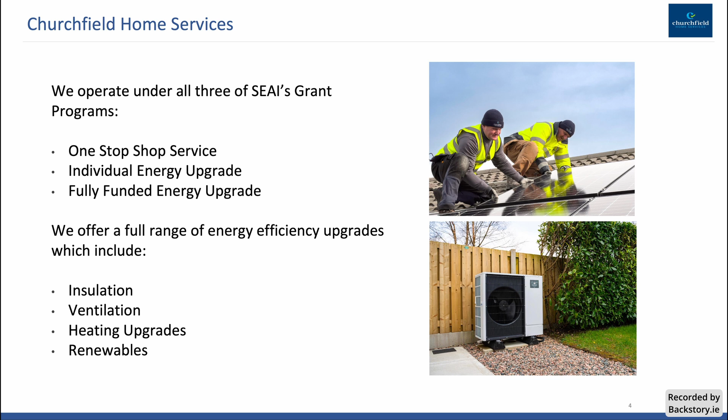We have been registered with SEAI under the grants programme since 2008, and to date we've upgraded over 6,000 homes. Last year we upgraded over 800 homes, and each year we're looking to build on that. We operate under SEAI's main programmes, the main three being the one-stop shop programme, the individual grants programme, and also the fully funded Warmer Homes programme. We offer a full range of energy efficiency upgrades from insulation to heating, ventilation and renewables.

What makes us different? We're a little different to the rest of our one-stop shop competitors in the sense that we're trained and qualified to complete all designs in-house. The one-stop shop programme is more than the grant funding. What you get when you participate in the one-stop shop programme is access to much, much greater expertise in terms of design. Obviously the integrated grants, the deduction of the cost of the grants up front. But design is really important. What we've learned over many years is that we don't depend on any third parties for our design: our fabric design, our ventilation design, our heating designs, and our solar designs.

And we find that when a building or retrofit project is well designed, that's the difference when you hear of a project that's working really, really well and somebody that may have purchased a new house in the last number of years that is not performing like a new house. We don't outsource our designs to any third-party contractors or suppliers, which ensures that all of our designs consider all elements of the retrofit being undertaken and provides an optimum design outcome on each project we undertake.

One common issue that I see quite often in the new builds sector is where you might hire a main contractor. A main contractor then may hire a plumber to do the plumbing. The plumber then might outsource the labour to a contractor, and then he outsources the design to a supplier. And I've seen a lot of the heating system designs coming back from some of our key suppliers in the country, and there'll be a line in it somewhere: it is assumed the home is well insulated.

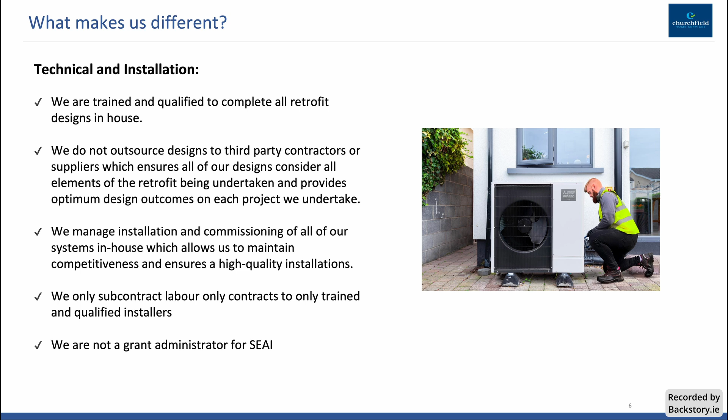The benefits, I suppose, of retrofitting a home, and I think these are quite widely understood. Primarily when we survey our customers, and we do it every year, you're looking at the enhanced comfort and savings. We're also looking at the value you add to your home. So if you've got an existing home that's a D-rated or a C-rated home, and you upgrade it to a B2 or an A1, the value of your home is going to increase.

There has been a recent study published that we were involved with, under the Warmer Homes Scheme, where they upgraded, I think, over 1,000 homes for people who had health and respiratory conditions, and they've surveyed and monitored the health of those occupants, and it can be now proven that retrofitting your home will enhance your living environment within a home, and create a comfortable, healthy living environment. We all like to say we like to reduce our carbon emissions, and in reality it's nice to do things for the environment once it's cost effective, and obviously then to avail of generous SEAI grants that are available.

The one-stop shop service, what is the one-stop shop service? It's a complete home energy upgrade solution for homeowners. So SEAI over many years have been running many pilots. So you might have been aware of the deep retrofit pilot that ran back in 2018 and 2019. We participated in that pilot, where at that time the grant funding was up to 50%. And essentially that was the pilot for what is now known as the one-stop shop. So SEAI have done a huge amount of research to understand what are the barriers that are preventing more and more people from upgrading their homes. And they have tried to put together the one-stop shop service that mitigates against many of those barriers.

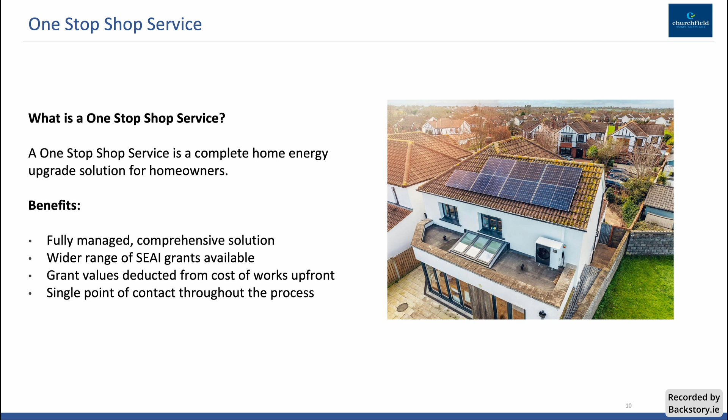What does the one-stop shop service look like? Well, our typical one-stop shop service, and I do acknowledge the one-stop shop service in general is generally going into existing homes and retrofitting existing homes. So we'll find that there will be differences and caveats for people that are choosing to opt for the one-stop shop service that are also affected by mica. So generally it includes your home energy assessment, the grant application is completed by the one-stop shop, project management is managed by the one-stop shop, installation of all works, post-BER assessment, and that access to the low interest finance.

The grants that are available. So you may be aware, and I'll just quickly run through the grants that are available through the one-stop shop process. So we've got €6,500 towards the installation of a heat pump. If you're installing a heat pump through the individual grants program, you can avail of €6,500. If you do it through the one-stop shop service, you're eligible for an additional €2,000 towards the cost of upgrading the heating system, and also an additional €2,000 launch bonus to achieve your B2.

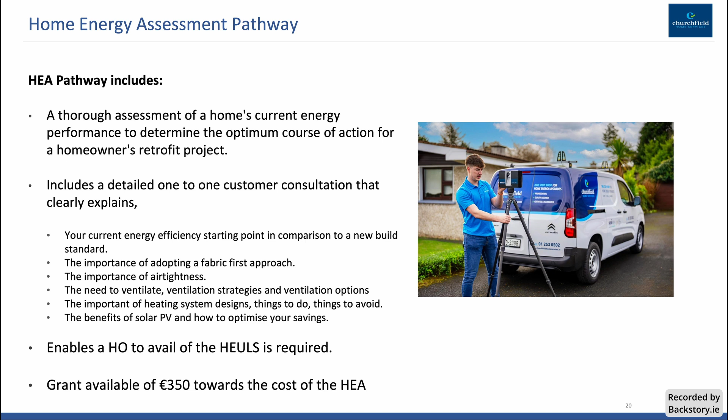As touched on, it enables you to avail of the low interest finance, and there's a grant towards the home energy assessment of €350. The home energy assessment package includes, so I've grayed out some of these things that aren't particularly relevant in your situation, but for a typical house, it includes a laser scan survey, 3D model, pre-BER.

There's a choice of 2 upgrade plans. So typically, before consultation, we prepare 2 upgrade plans. We prepare the minimum and we prepare the optimum. And then we can compare costs and paybacks and grants with both. And then it allows us to, I suppose, we ask people to come into the consultation without a bias, and let's just talk openly about what the optimum solution is.

We have an estimated cost for the 2 upgrade options. We have the detailed customer consultation to choose the most optimum solution. And then through that consultation, what I find is somebody says, well, actually I have plans to put on an extension. Or perhaps, you know, I'm looking at doing other work down the line. It also includes a technical assessment based on your chosen upgrade and a detailed home energy assessment report.

So typically the cost of a home energy assessment ranges between €700 and €800, less the €350. It's about a spend of €500. And what I would say to people is, anyone considering, just from the retrofit point of view, spending up to €80,000 on retrofitting a home, less the grants, €500 is a sensible investment. In your situation where you're looking at spending multiples of that rebuilding a home, I think it's very advisable.

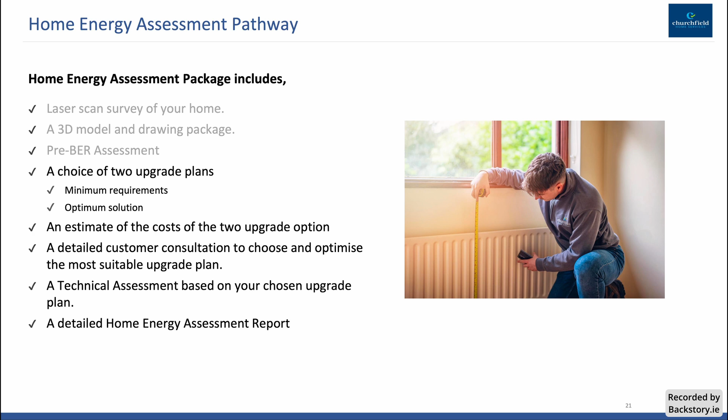Second option, the main steps that this process includes, for anyone that hasn't started your project or appointed a builder, is to contact a one-stop shop or request a home energy assessment. Typically what we're seeing, and we're working out to be the best approach, is that your architect and engineer provides the OSS with the digital copy of your plans, so you've got upgraded plans, provide those to us that we can base our design on.

The one-stop shop carries out the home energy assessment, issues the HEA report to the homeowner. The cost of the energy efficiency works net of the grants should be included as part of the tender package, and the one-stop shop should be included as a nominated subcontractor. So for people that haven't started, you've got time to get your home energy assessment, get the design optimized, and include that as part of your tender package to your builder.

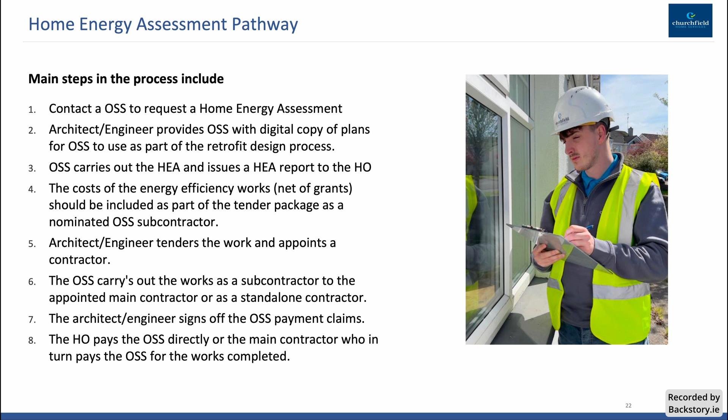For homeowners who've gone further than that, it's a little bit more complicated. The OSS can carry out the works as a subcontractor appointed to the main contractor or as a standalone contractor. The architect or engineer is required to sign off OSS payments. So at the end of the project, we have declarations of works that we need to sign off to claim the grants, and the engineer and architect are required to co-sign that with ourselves. The homeowner pays the one-stop shop directly, or the main contractor, who in turn pays the OSS for the works completed. So where you haven't started the work, it's relatively straightforward.

The home energy upgrade pathway, where building works have started, a main contractor has been appointed, but the energy efficiency works have not commenced. So for people at the stage where you've demolished a house, you have a contractor on site, works have started, but you don't have windows, or you don't have a heating system, you don't have solar PV, you can avail of the one-stop shop program through this pathway. It's faster than HEA. So where a project is on site, time is of the essence.

You've got a builder, and one of the important notes to consider is where you've a contract in place with your existing builder, you do need consent, and you need your builder to work with you to introduce a one-stop shop. If you have a contract in place, the contractor can say, well, I've signed a contract to deliver the works, I'm just going to deliver the works. So that's the conversation, and that'll need to happen on a case-by-case basis.

The home energy upgrade usually follows the home energy assessment. However, if a project is already on site, it's faster to skip the home energy assessment process and go straight to the HEU stage. So essentially the HEU stage provides the detailed retrofit designs for each element of the work that's being carried out to ensure that an optimum retrofit design is achieved.

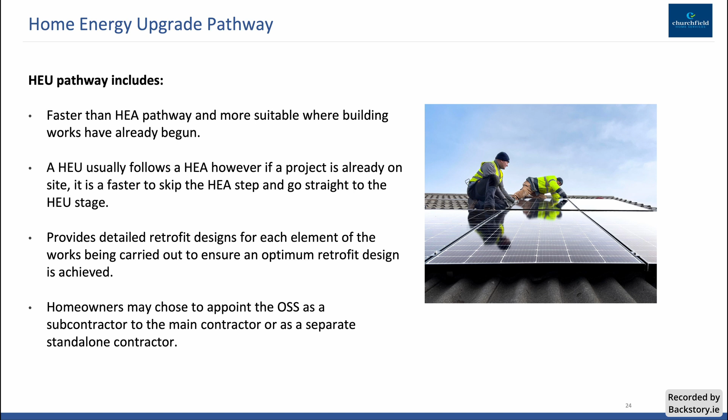Homeowners may choose to appoint a one-stop shop as a subcontractor to the main contractor or as a standalone contractor. The home energy upgrade fabric design includes ensuring the HLI factor is under 2 or as low as possible, or giving you options.

Providing an air tightness strategy to reduce your air leakage below 1 or as low as possible. So we can give tips and tricks to your builder before he starts on how to put in his air tightness membranes. So there's some just handy things to know, and you could be engaging with a really good builder that's really honest and wants to do a good job, but there are little things that we've seen that we can share with your builder on how to do it easier and better.

It includes a ventilation design for your mechanical ventilation. Again, if you're rebuilding a home, you should be going for as low air leakage as possible, which means you need to be considering a mechanical ventilation system. It also includes the room-by-room heating system design for heat pump, the controls, the underfloor, the radiators, or a combination of both. And we also include an optimum solar PV design, including PVGIS, estimation, generation, and expected rate of return.

PV is really good. One of the concerns I have about PV at the moment, however, is PV is a bit like a dessert. It's great at the end. And what's happening at the moment is the figures that have been published in relation to the number of homes upgraded to a B2 or higher are being slightly inflated, where a lot of people are upgrading their homes by adding solar PV. And by using the solar PV to upgrade their homes beyond a B, they're not eligible for the one-stop shop then later.

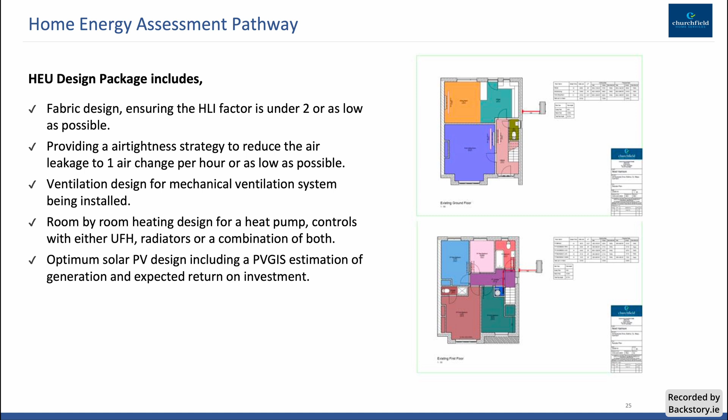But I really do highly recommend, especially where you're installing a heat pump, solar PV really complements a heat pump. But not to confuse, your solar panels are not going to run your heat pump. Your solar panels will, in the summertime, offset your energy bills in the wintertime. So typically, where a heat pump has been installed, we look at how you maximise the solar PV output, and then provide a range of measures from either flat roof, pitch roof, or even in some situations in the country, a ground mount system would be an optimum solution.

Main steps include: contact an OSS to request a home energy upgrade package. Again, the architect or engineer provides the OSS with a digital copy of the plans for the OSS to use as part of the retrofit design process. The OSS carries out the technical assessment and issues the technical assessment to the homeowner. The OSS will provide a quote for the energy efficiency works that includes the deduction of all SEAI grants.

Now, where you have a situation where people have started the works and the windows are in, we're not in a position, because we as an OSS, and all OSSs, are audited by SEAI on a quarterly basis. We have our audit next week actually, and for all our OSS projects, we have to provide the quote, a contract that matches the quote, and all invoices and payments and receipts to match it.

SEAI's explanation is, where they're providing taxpayers' funds, they must be able to demonstrate that the funds were used to pay towards the service, and they cannot do that if the one-stop shop provider did not provide the service. So in that situation, a homeowner could choose to say, okay, well, the windows are in, we can't claim the grant, but we can claim the grant for the rest of it, and there is a third pathway.

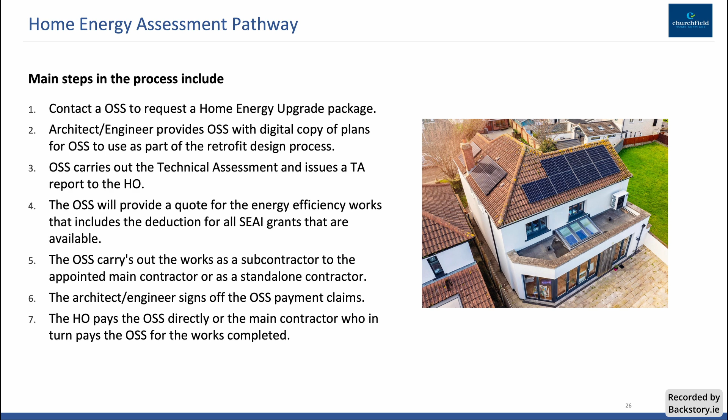The one-stop shop carries out the work as a subcontractor to the appointed main contractor or as a standalone contractor. The architect engineer signs off the OSS payment claims, and the homeowner pays the OSS directly or to the main contractor, who in turn pays the OSS when the work is completed. And it is always the net amount, so it's the total cost less the value of the grants. The grants are paid to the OSS at the very end of the project.

The third route is the route where I don't have as much information. And I said at the beginning, what I know, and what I don't. So where projects are largely complete, where the building works are largely complete, the energy efficiency works are largely complete, SEAI have instructed that the third route is you need to apply to SEAI directly. You apply, and I'm sure you're familiar with their website, there's a form to fill. You submit the form.

What do I know about what happens next? Not a huge amount. What I have been told is that they are working on something that will cater for homeowners who have had to proceed with the works while they're waiting for all this to come through. We had a meeting last December where we were told the decision on this was imminent. So we understand things have taken longer. It's above our pay grade, but for homeowners in that situation, we do know that there is going to be a process. All that we can say is you apply directly. We're not going to be able to process those applications, but something is coming. How soon? We've been told we can expect information by early September. I cannot say any more in respect to that.

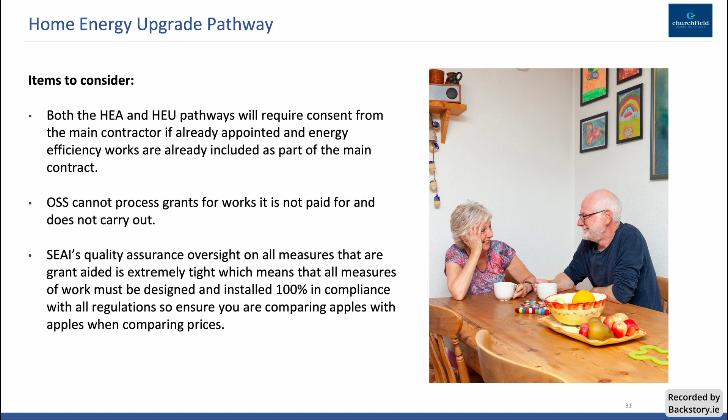So you want to ensure that you're comparing apples with apples when you're comparing prices. I've seen from time to time, maybe ventilation, a couple of measures, and you're looking at some prices and you're just saying they're not quite right. So you do want to be mindful. And one key advantage with the one-stop shop is the design and the quality assurance of what you're going to get.

Our approach is we understand that every homeowner's requirements will be different. Projects where works have already commenced will be complex. In some cases, it will be a new challenge to work alongside existing builders, particularly where contracts are in place. We will try and adopt a tailored approach wherever possible, and we don't yet have all the answers. So we'll put our hands up and say we're in the process of starting works on a number of these projects. Have we completed any yet? No, we're still just ironing out how best to work on this. But given the volume of homes that are affected, it's going to take some time until we iron this out.

So for homeowners that have not yet started, I think it'll be reasonably straightforward. For homeowners that have started, we need to take a case-by-case basis. And for homeowners who have the works largely complete, your application will be directly with SEAI. And again, just reiterating those choices, you can avail of the OSS grant support through a registered one-stop shop where the energy works have not started. You also can avail of the individual energy upgrade grant support through Better Energy Homes registered contractors where works have not yet commenced, or maybe you have works commenced and they are registered. You're in a position to avail of the individual grants.

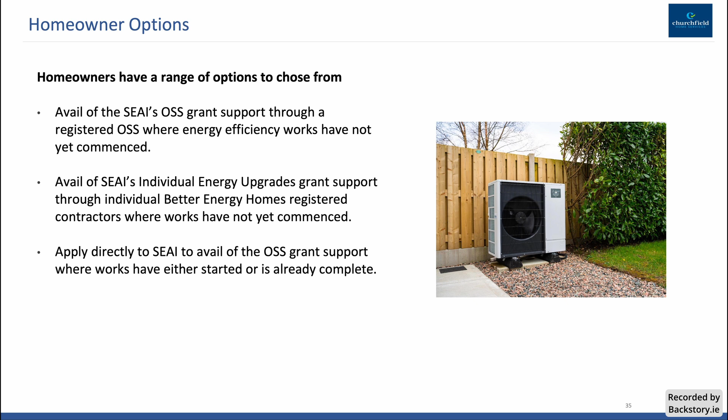But the difference with the individual grants is there's not the same range of grants available. So you're down to 6,500 for a heat pump. You don't have anything towards project management. You don't have anything towards mechanical ventilation or air tightness or the bonus measure for the heat pump or the radiators. So it is a lower level of grant aid, and you can apply directly to SEAI to avail of the OSS where works have started and are near completion.